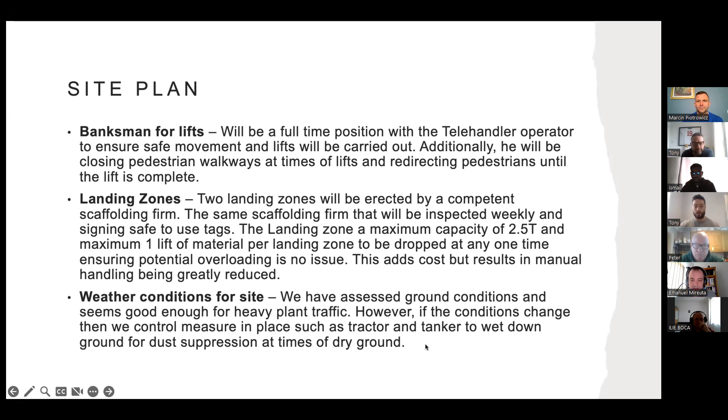Right, so this is my part, which is a welfare assessment. As part of the works, we've provided welfare facilities for all of the workers involved. Obviously, this will include flushing toilets connected to a tank, a water supply via refillable tank and drainage tank for any waste. Toilets are ventilated, lit and kept clean at all times, with a cleaning schedule; cleans will be arranged by dedicated cleaning staff, including supplies of toilet paper, etc.

There will be wash basins with hot and cold water, warm running water next to the toilets with soap and towels. The basins will be large enough to wash hands, face and forearms. Obviously, we will be employing the company that's filling up the water to just do random tests or clean the system out as often as possible.

Obviously, the warm water's going to be kept at 50 degrees to try and combat Legionella, and then we'll put thermostatic taps onto the actual basins themselves to make sure that no one scalds themselves. As mentioned, the toilets will have running water from a bowser, with the waste collection being emptied on a regular basis. Next slide, please, Tony.

Thank you. We have completed a comprehensive welfare study, and as such, we have the below information based on the intended 20 workers on site, with 25 when the design team visits. On site, we're going to have a canteen cabin, an office, and a drying room split with a locker room, you know, take it from there.

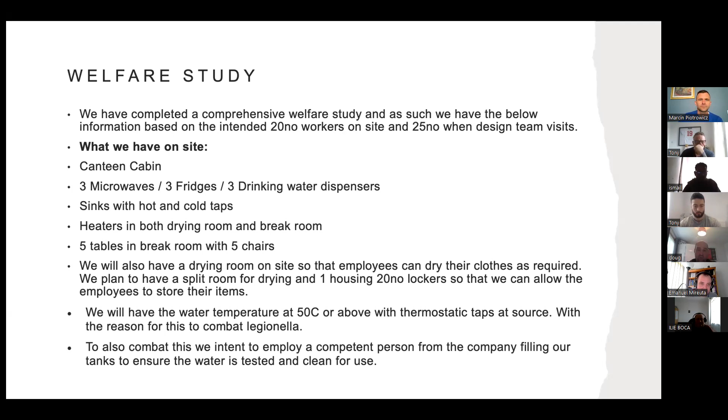As mentioned before, we keep the water at 50 degrees C and then thermostatic taps. And to also combat this, we will want to employ a competent person from the filling company to do that.

I'm just going to pass you on to Halim to deal with the traffic management plan. Traffic management plan, this is the part I'm going to talk on today in this presentation. Just as a fact, on average each year, about 7 workers die as a result of accidents involving vehicles or mobile plant on construction sites. A further 93 are seriously injured.

Our design construction traffic management plan, CTMP, establishes vehicle routing and tests to ensure that vehicles can access and egress the site safely during the construction phase. This is typically in the form of routing plans, restriction on timing of vehicle movements, temporary enabling works, and parking suspensions. The routes will be suitable for the people or vehicles using them, in suitable position and sufficient in number and size. In order to prevent incidents on site, which can and should be prevented, we carefully implemented these key issues into our traffic management plan.

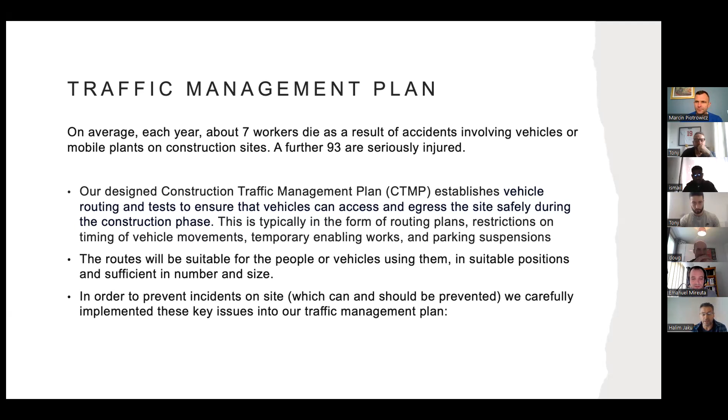Segregation. The majority of construction transport accidents result from the inadequate separation of pedestrians and vehicles. This will be avoided by careful planning, particularly at the design stage, and by controlling vehicle operations during construction work. The following actions will help keep pedestrians and vehicles apart. Entrances and exits: separate entry and exit gateways for pedestrians and vehicles. Walkways: provide firm, level, well-drained pedestrian walkways that take a direct route where possible.

Crossings: where walkways cross roadways, provide clearly signed and lit crossing points where drivers and pedestrians can see each other clearly. Visibility: make sure drivers driving onto public roads can see both ways along the footway before they move onto it. Obstructions: no walkways will be blocked, so pedestrians won't have to step onto the vehicle route. Barriers: installing a barrier between the roadway and walkway.

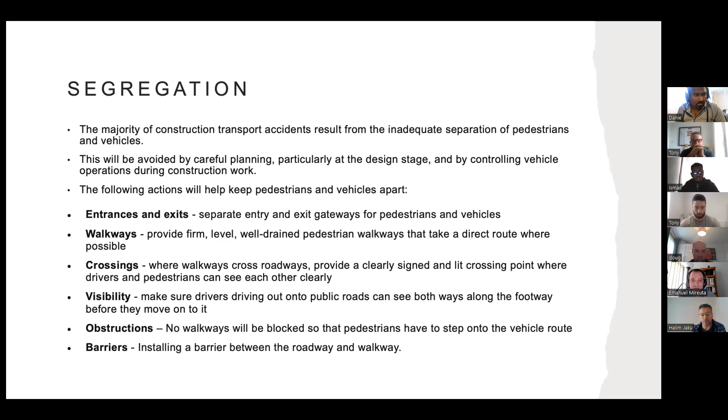The next slide, please.

Minimizing vehicle movements. Each year within the construction industry, approximately 10 people die as a result of being struck by vehicles on site. In addition, there are hundreds of preventable accidents and injuries. Inadequate planning and control are the root cause of many construction vehicle accidents. Good planning can help to minimize vehicle movement around the site. For example, landscaping to reduce the quantities of fill or spoil movement, foresee skip renewal, and organize waste to be removed as needed.

To limit the number of vehicles on site, provide car and van parking for the workforce and visitors away from the work area. An overflow car park has been provided. Controlled entry to the work area via booked-in deliveries and time slots. Planned storage areas so that delivery vehicles do not have to cross site unnecessarily. They will be issued directions and instruction prior to the visit, then again by security on site.

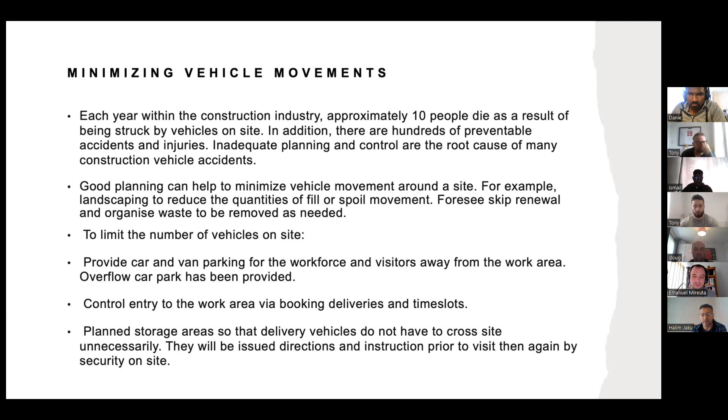Next slide, please. I think passing over.

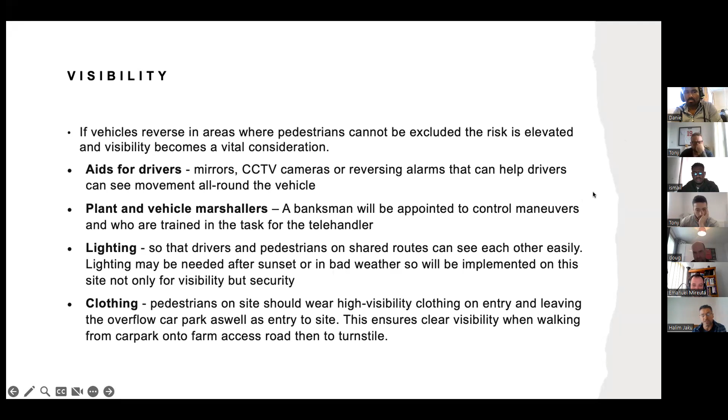Hand it over to the next team member. Hi, my name is Peter. I'm here to talk about the signs and instructions.

All drivers and pedestrians know and understand the routes and traffic rules on site. Use of standard road signs where appropriate. Induction training for drivers, workers and visitors, and instructions sent out to visitors before their visit, will be provided on what to expect when they get on site.

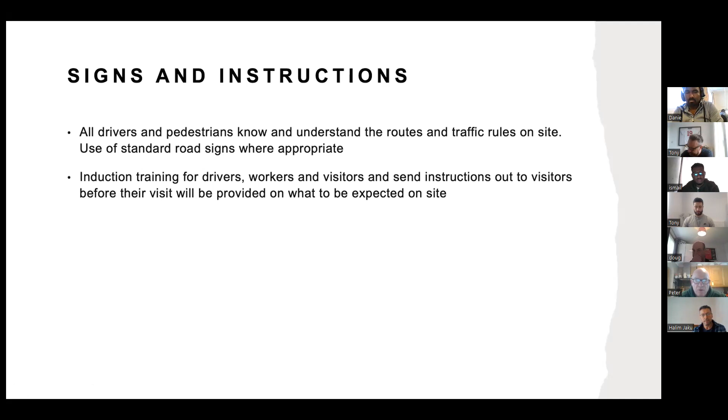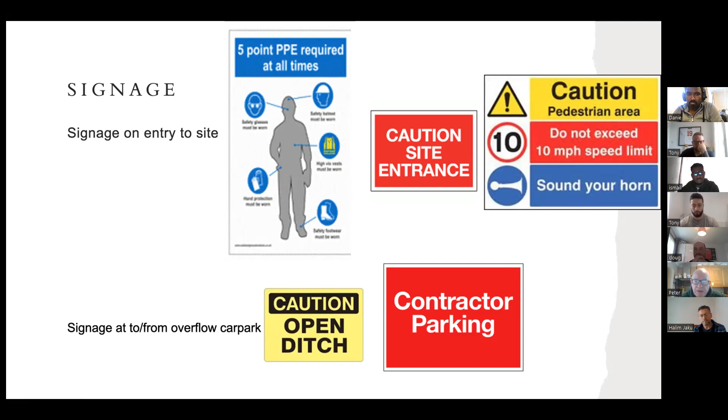Outside the gate, we'll have a caution site entrance, and in the car park, where the car parks are, we'll have signs up for contractor parking. Going along to the overflow car park, where the drainage is, we'll have signs for caution for open ditches. We have a 10 miles per hour speed limit for any vehicles on the site.

On the site, we'll have a fire assembly point, which will be labelled up. Fire exits will all be marked up, pointing in the right direction of where we need to go. Around the site, we'll have fire extinguishers, and they'll all be labelled up, and a fire alarm call point, which will either be a bell or a sounder system.

We'll have signs around any electrical cable areas, advising that there's overhead power lines. For traffic going round, we'll have a beware of movement of vehicles around the site, and also that it is a one-way system. Over at the welfare cabins, we'll have signs for toilets and the likes of. And there'll be various other signage around the site.

I'd like to hand over to Ilie. Hi guys, my name is Ilie Boca. I'm site security supervisor.

Around the site, post and timber panels will be used to contain the site and segregate the working area. The fence line will be clear of any material or equipment so there's no place to hide. Do not store any materials on the fence to create an easy way to climb over the fence. Entering the site, the gate is controlled by security with sign in and registry.

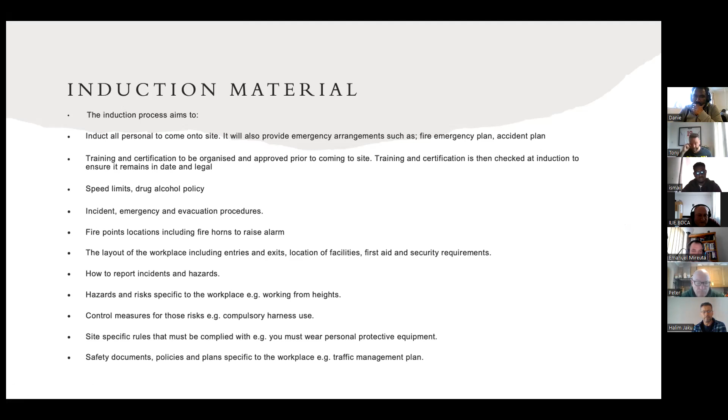the workplace, working from heights, control measures for those risks, compulsory harness use, site-specific rules that must be complied with. You must wear personal protective equipment. Safety documents, policy and plan specific to the workplace, traffic management plan.

Emergency procedures and arrangements. In the event of fire, sound the alarm. The sound of the alarm will be the horn. Sorry? I'll take over here, Ili. Emergency procedures and arrangements. Hello again. By all means, intervene when you want to take it over. I'll keep proceeding.

In the event of the fire alarm, the sound of the alarm will be an air horn. The air horns are located throughout the site. If the fire is detected, automatic detectors will sound the alarm. And obviously, if anyone sees a fire, another main means of alarm is a verbal shout out.

Action staff should take on hearing the alarm is dial 999 and request attendance by the fire service. The staff member gives their name, address of site, contact number and details of the fire. Everyone on site will commence mustering, ensuring this is done in a calm and orderly manner, providing assistance to those needing additional help in evacuation.

If it's safe to do so, electrical and gas supplies should be switched off before leaving the building site. Meet at the assembly point. The general car park at the main entrance is our assembly point.

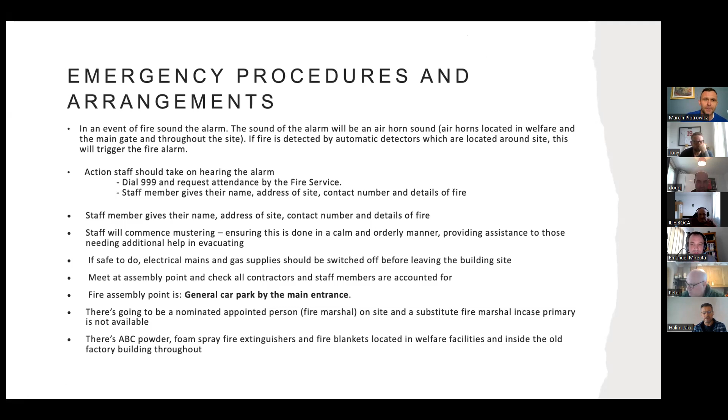There's going to be a nominated appointed person, a fire marshal on site, and a substitute fire marshal in case the primary is not available. There are ABC powder and foam spray fire extinguishers, and fire blankets located in the welfare facilities and throughout the site and inside the factory building.

The next is the 3-tier accident plan. We've got tier 1, which is injuries that can be dealt with on site, such as cuts and bruises. There's going to be 2 first aiders on site and first aid kits in the main entrance and in the welfare facilities.

When it comes to more serious accidents, hospitalization, the nearest hospital is 15 minutes away, which will be shown in an indication. Then there's an AED at the main gate. Tier 3, if the injured person cannot be moved, we dial 999 and wait for the help. First aiders carry radio at all times.

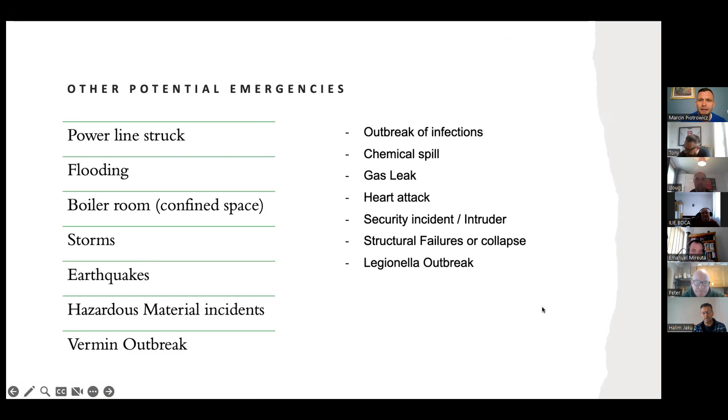Other potential emergencies: power line strike, flooding, boiler room is a confined space, storms, earthquakes, hazardous material incidents, outbreak of infections, chemical spills, gas leak, heart attack, security incidents or an intruder, structural failure or collapse of the 2-story building we're working in, or Legionella outbreak.

The mental health and well-being, it means different things to each of us, but generally it's about having the energy to do what we want to do when we want to do it. This means we each need to look after and invest in ourselves every day with good lifestyle habits and health, diet, and regular exercise.

On this project, we plan to introduce a talk room, a weekly talking session with a trained person in a designated private place where anyone could come and share their thoughts and worries, either individually or as a group. There's also going to be materials and information helping to develop the knowledge and understanding of how to look after our mental health and cope with normal feelings of distress and worry, especially during difficult times. I'm going to hand over to Doug.

Just a quick note here on the safe system of work. We have a couple of bodies that we need to bring onto site from an agency. I have forwarded on the relevant information to your health and safety officer so that they have the bare minimum risk assessment and method statement of what they are going to be doing and when they're going to be on site. This publication will be available to all. We'll email it out after the meeting, and then there's a little bit more on the safe system of work in that. So basically, I'm going to pass you over to Pete now, who's going to be doing permissions.

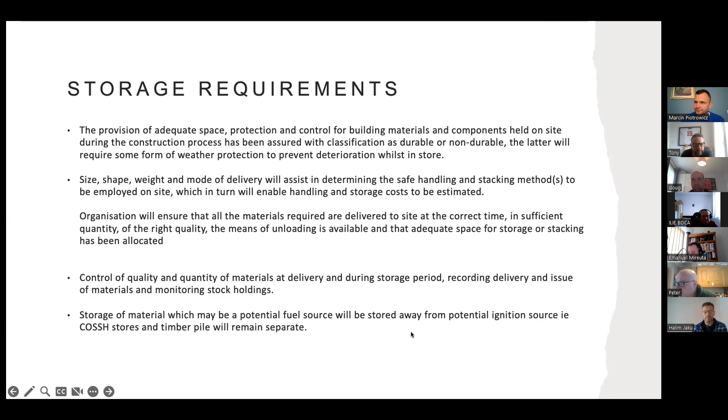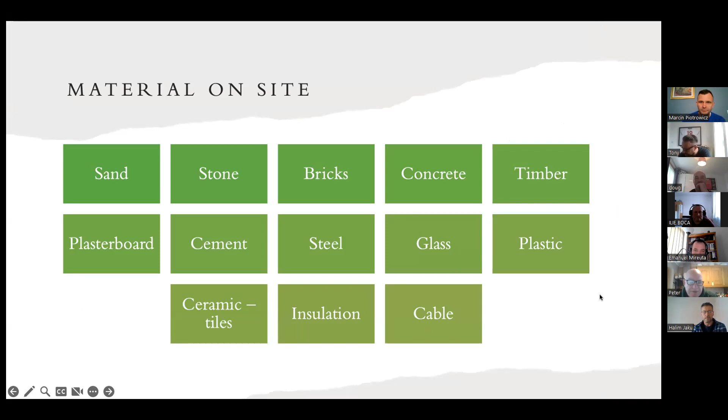I want to nip through a little bit. I'll let you read that one, nip through just so we can speed up the process of our presentation. Storage of material which may be a potential fuel source will be stored away from potential ignition sources. COSHH stores and timber pile will remain separate. Here's some of the materials that we'll be storing on site. Yes, I can take it over from here, Peter.

Site rules. Do not start without an induction. Always report to the site office to sign in and out of the site, including drivers, visitors, and workers. Always obey safety signs and rules. No smoking on site. PPE rules. Hard hats must always be worn on the site. High visibility jackets must always be worn on the site. Safety footwear must be worn and be of the lace-up type. Additional PPE must be worn as required in task-specific risk assessments.

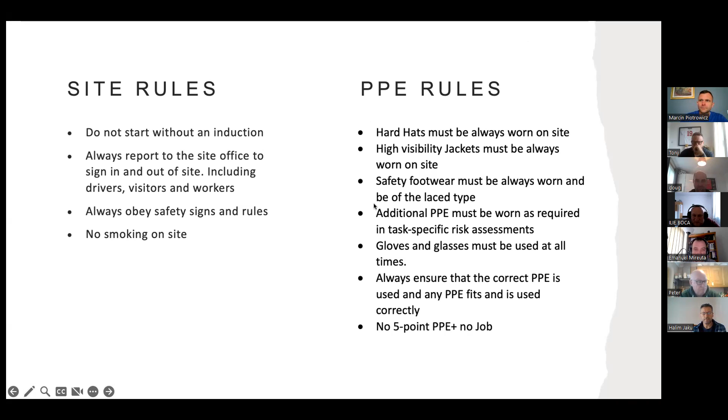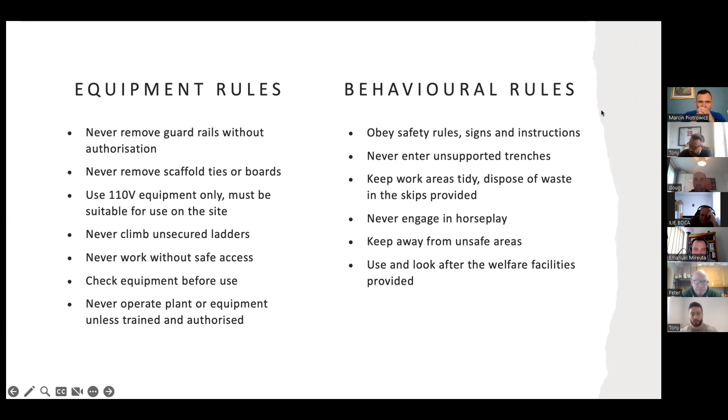Gloves and glasses must be used at all times. Always ensure that PPE is correct, fits, and is used correctly. That's it. Perfect. So now we've got equipment rules and behavioural rules. So these are the few rules that we adhere to on site. Feel free to take a look. Use 110 volt equipment, must be suitable for use on site. We've also got a couple other rules. These are some of our security rules and reporting.

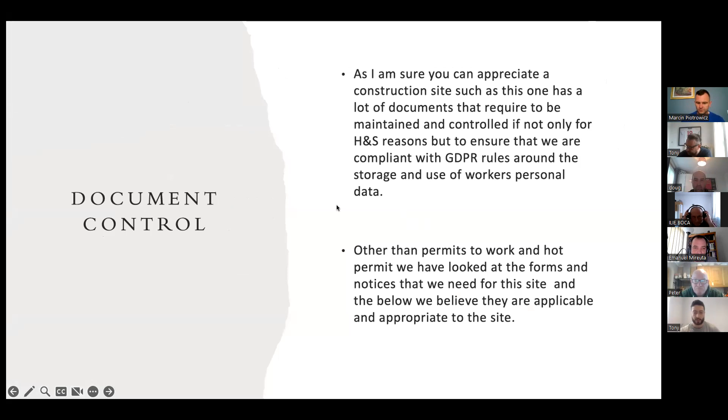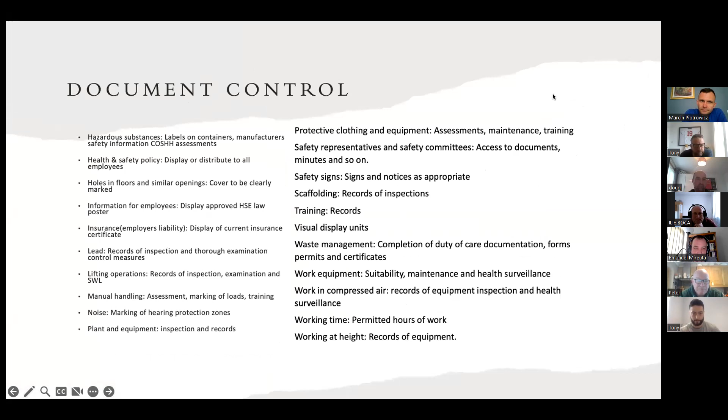And we've got document control. As I'm sure you can appreciate, on a construction site a lot of documents are required, maintained and controlled. Other than permits to work, hot work permits, all the forms and notices on site where applicable and appropriate. And these are a few of our document controls that will be found in the office, and the site manager will be able to issue them. Thanks a lot, and I hope you enjoyed the presentation.

Right, as is traditional at this point, let's give it a round of applause. Well done, guys. And can I open up the floor to the first question, please? Is there anyone on our team or? Can I ask the first question? Did we make it on time? Oh, you just ran out of time as document control came in, but that's not bad. I saw Tony flipping. I know. We tried to flip through the last few just to speed up. We're still in role play, guys. Let's not forget the role play. Of course. So can we invite the first question, please?

Yeah, I got a question. I heard something about a canteen cabin on site. I didn't see it on the site drawing. Can you just show us where the canteen cabin is going to be positioned? Absolutely. Can you see that? Is it not sharing? Not yet, Tony.

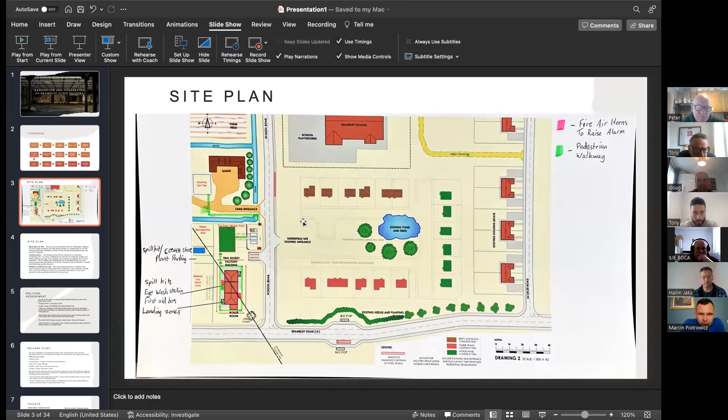You're on there now, Tony. Spot on. So these are the cabins located at the top right of the site. We've got the turnstile there and the security hut there, and this area is completely segregated from the car park and muster point with access there. Right, thanks.

Any more questions? Yeah, I've got one. Is the car park that you've got in the actual construction site, not the overflow, is it gated and protected at all, or is it just open? This car park, it's from this area here, so it's actually blocked off, and this bit here is, it's hard to tell, but it's already tarmacked and a car park's already there. Oh, okay. So it is actually segregated via curb. Yeah. That bit. And then you've got your traffic flow coming through here and down.

I've got to get my questions out. I've got a couple more. Right, I was just wondering if anybody else on my team's got any, or no. I know you mentioned you had one.

Well, you designated fire people. If the fire brigade were to turn up, would there just be one person dealing with the fire brigade straight away? Yeah, it'd be the primary fire marshal that would be dealing with the emergency services. If that person, however, was not to be in, then a secondary person is nominated and fully trained and competent, and they will take the place in case the primary is off on leave or ill.